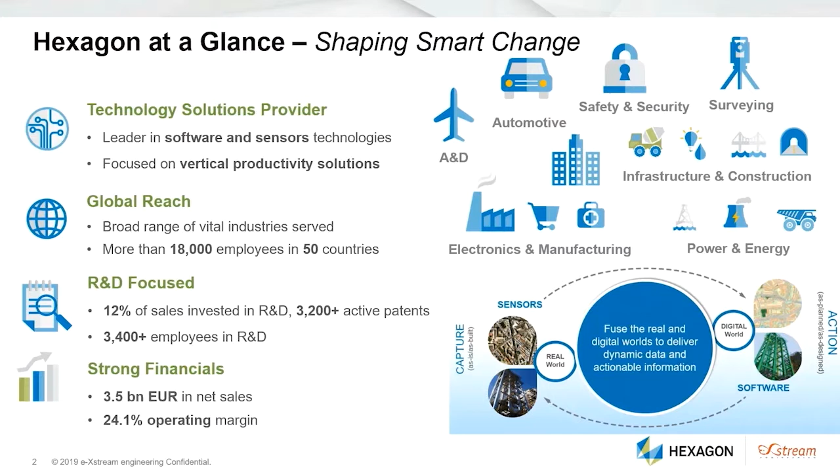Global reach and strong financials are the DNA of the technology solution provider company. HMI is our Hexagon Manufacturing Intelligence division, focusing on smart factories. The purpose here is to have a deep understanding of industrial workflow. The link between the real and the virtual, known as digital twin, aims at mastering processes with software for design and engineering, manufacturing and metrology, but also with metrology hardware. Hexagon HMI provides best-in-class solutions for smart factories.

As you know, after a period of production offshoring, companies are now willing to reshore. This can be achieved with smarter production organization and simulation. MSC Software is providing virtual prototypes for manufacturing with Simufact, and for structures, acoustics and fluids with Nastran, Marc, Actran and Cradle software. In the domain of autonomous driving, VTD, Virtual Test Drive, allows simulation of hours of driving in many conditions to accelerate validations.

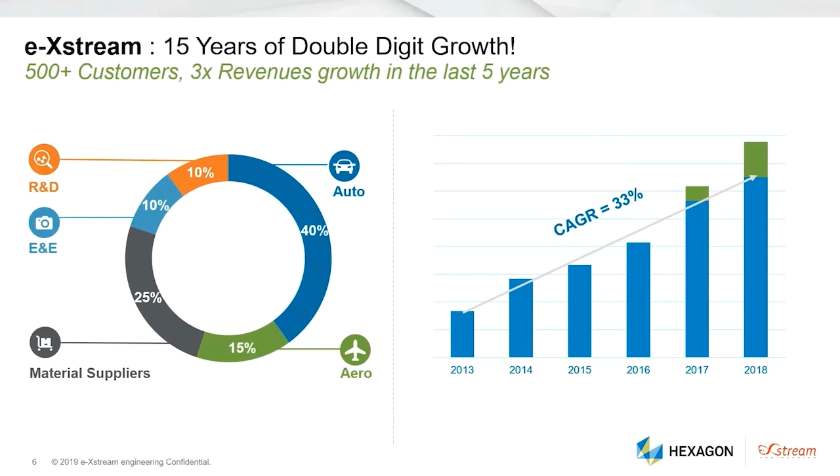In the field of materials, Digimat from e-Xstream engineering is pushing the limits of material modeling, addressing the challenges of new materials. e-Xstream engineering is a team of passionate material and process experts. Our software platform, Digimat, aims at providing the best of integrated computational material engineering. A newcomer in our portfolio, Material Center, is a preferred tool for material lifecycle management. e-Xstream has 15 years of double-digit growth and today more than 500 customers. The main domains of activity are automotive industry and material suppliers, but also aeronautics, electric and electronics, and R&D.

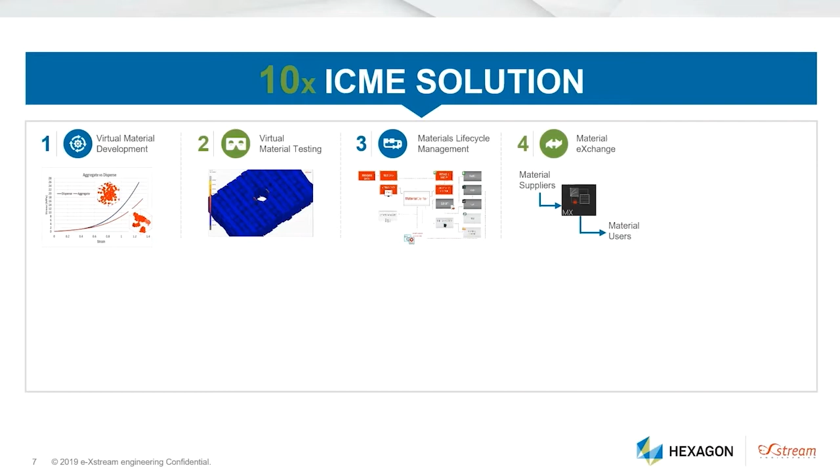We will continue growing thanks to this 10x strategy, and this is what we will talk about today. Virtual material development is the first topic we will cover, how to reduce costs with simulation. Then comes virtual material testing, where some huge savings can be found. Material lifecycle management is a growing subject, as well as material exchange. How to bring the R&D work to the desktop of final users is what we address here. Compliance management is probably not the favorite topic of material scientists. Nevertheless, if it's not well managed, consequences may be significant on day-to-day business.

Back to e-Xstream's DNA, the effect of processing is of course of main interest in integrated computational material engineering. At the core of our know-how is accurate material modeling to deliver the best results in CAE. With the fast-growing market of additive manufacturing, Digimat is again bridging the gap between processing and final properties. The rise of artificial intelligence is a challenge and a chance for ICME. Finally, going back to the real world and closing the loop of Hexagon strategy, digital continuity will end the presentation.

Welcome to this short video introducing virtual material development and its connection to molecular dynamics. Let's remind that since its birth 15 years ago, Digimat was designed from the beginning to be a fast, robust, and easy tool for the user. Second, e-Xstream customers benefit from premium support and expertise, which is more than welcome, especially in such challenging environments. Third, e-Xstream and Digimat's main mission is to bridge the scales and disciplines in an efficient and effective manner.

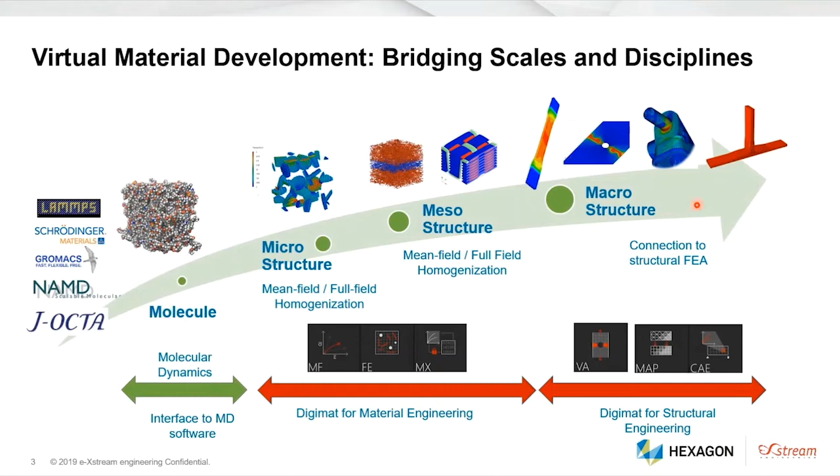Bridging scales and disciplines is key when dealing with virtual material development. Indeed, the goal is to connect the dots starting from the molecular scale until the structural scale. When dealing with virtual material development, there is a key notion which is virtual screening, standing for testing different configurations of microstructures and possibilities of combination of different materials. Digimat tools are built such that it makes it possible to test different configurations and types of materials, microstructures, and processes, which is key when developing virtually new materials.

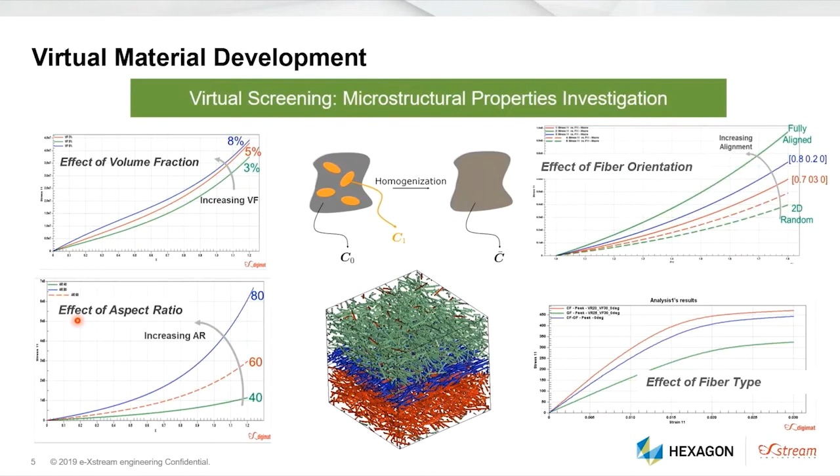Once the designer defines the process and the microstructure he wants to use for his next challenge, the next step is to refine the design of the new material by testing and virtual screening different local configurations and architectures, like testing the effect of different volume fractions or filler amounts, fiber orientation, aspect ratio, or fiber type.

Enough theory. Let's now move to concrete case studies in both the mesoscale and the molecular scale. First, let's begin with the mesoscale.

The first case study stands for investigating the ideal trade-off between stiffness and density for a foam microstructure. Foam microstructures can come with different types, whether it's an open cell topology or a closed cell topology. It can also correspond to different amounts of voids inside them. The idea of this case study is to find the best trade-off between the relative density and the relative stiffness for such microstructures.

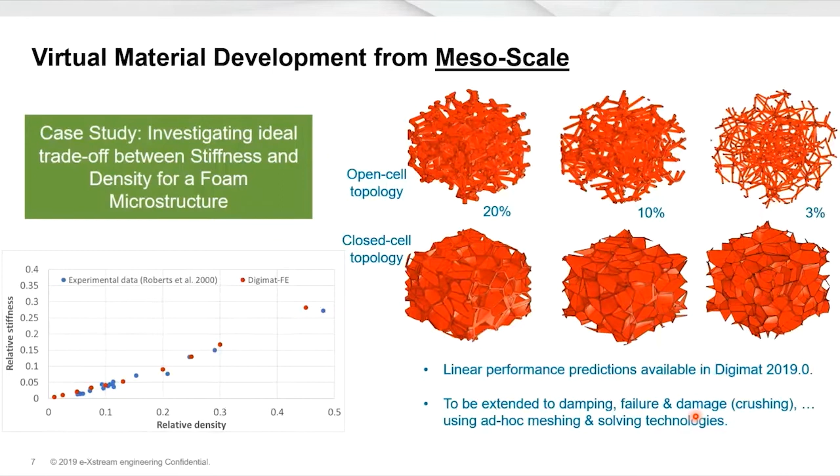As we can see, the Digimat tools can predict accurately the experimental data, plotted here in blue dots, by comparison to the red dots corresponding to the Digimat FE predictions. This is a first step and can be extended to more complex behaviors like the prediction of damping, failure, and damage using ad hoc meshing and solving technologies.

The second case study for virtual material development from the mesoscale is investigating the ideal reinforcement type and amount. The question here for the designer is whether to use carbon fibers or glass fibers, and with which amount of volume fraction. With this activity, we can compare 25 combinations, set them up, run them, and plot it in less than 2 hours.

When we compare such activity with physical material development, the latter can take up to months in order to perform such a study.

The third case study for virtual material development from the mesoscale is focusing on a highly emerging material process nowadays, which is 3D printing. The idea here is to use the multi-scale workflow for characterization of metal and polymer lattices for 3D printing. One of the major parameters is to optimize the architecture of the lattices that are printed into the structure.

The idea here is to virtually screen different configurations of architectures and end up evaluating the thermal, warpage, and stiffness impact that this architecture has on the final structure.

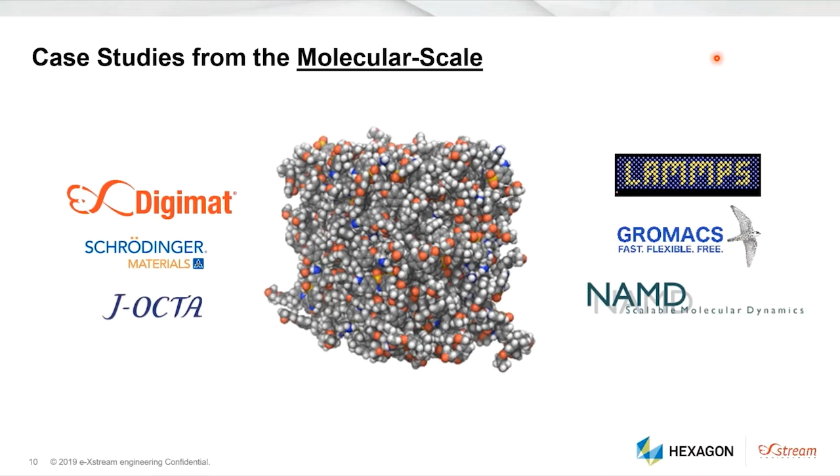Let's dive now deeper into the scales and go onto the molecular scale, and let's connect the dots between the atoms of the material and the final structure performance.

The first case study is focusing on the usage of molecular dynamics for feeding Digimat with a microstructural configuration. In this framework, the considered application is to optimize the positioning of silica particles inside rubber for tire applications.

In this framework, Schrödinger software for molecular dynamics is used in order to make the link between the molecular energy surface of the silica particles and their impact on the final configuration of spatial distribution of these silica particles.

The next step of the workflow is to use this result of molecular dynamics in order to feed Digimat tools in general, and Digimat FE in particular, with the positions of the particles, then build an RVE and deduce the stress-strain curves.

The next case study stands for using molecular dynamics and Digimat for material failure assessment. The idea here is to start from the atomistic chemical formula of a given resin.

Then, by using molecular dynamics software in order to assess the limit strain invariant failure parameters of the resin, we feed the Digimat mesoscale model with the resin failure properties, and Digimat is then able to compute the macroscopic composite failure. Hence, we make the direct link between the resin chemical formula and the final structural performance.

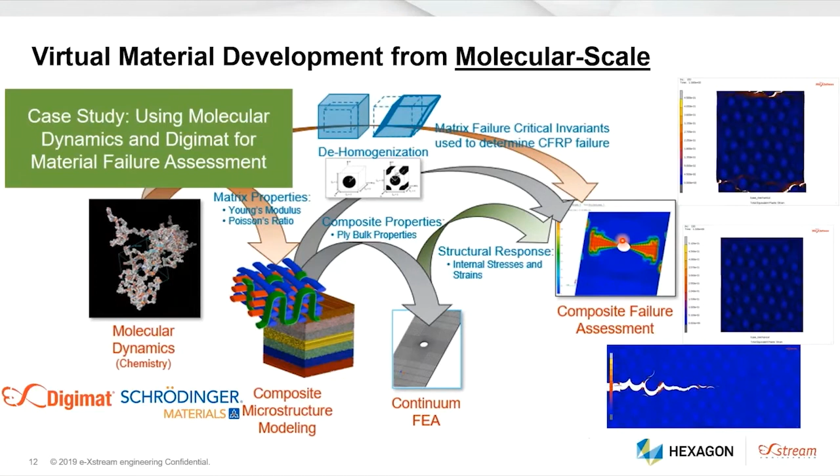We see an increased number of grades for a given performance. Indeed, different reinforced thermoplastics cover a similar range of applications, and other composite materials such as SMC and fiber mats bridge the gap from SFRP to CFRP. This has a direct impact on both material screening and characterization.

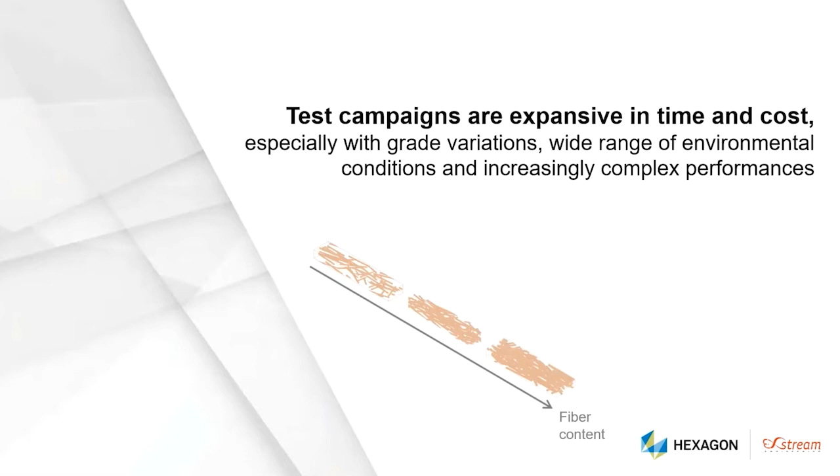Material characterization is expensive due to the number of options to evaluate. First, because multiple grade variations such as fiber content are considered. Second, because a wide range of environmental conditions including temperature, moisture, and aging should be covered. And finally, because design engineers now target advanced performances such as creep and fatigue, which tests last longer and therefore are more expensive.

Once a micromechanical model is calibrated on a reduced set of data, the strength of our approach is to predict composite mechanical response in other configurations. Such work allows combining a minimum of real tests with virtual tests to generate a wide range of data at composite level.

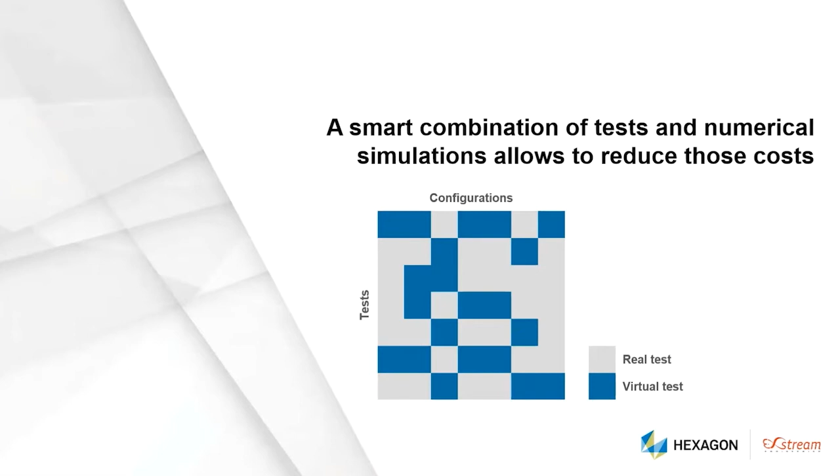Digimat enables several approaches of virtual testing. One approach consists in using Digimat as a virtual lab in order to compute composite mechanical response in other microstructural configurations. This allows, for example, to estimate material response at other fiber content.

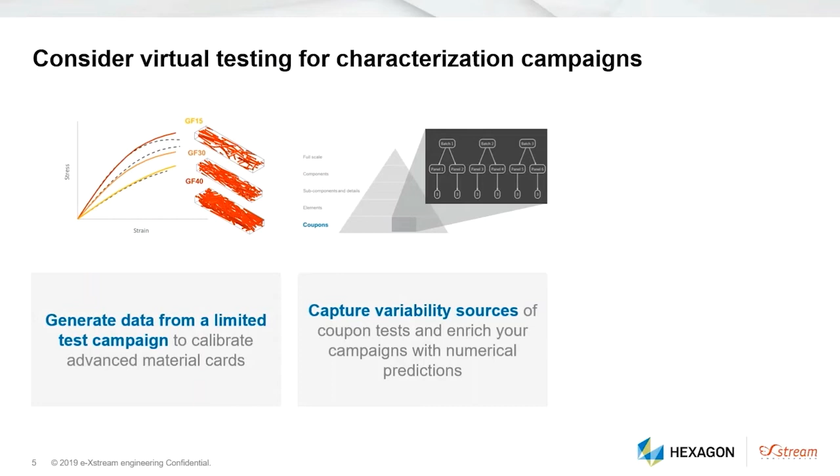Another approach benefits from its own product to capture variability sources at coupon level. The end goal is enabling evaluation of stacking sequence and to complement real tests with virtual ones, reducing the cost of very large test campaigns.

One last example is the estimation of the effect of defect at coupon level, which leads to knockdown factors to be applied to the design point. Here can be addressed effect of defect as well as of manufacturing. To consolidate those factors, Digimat allows evaluating the effect of some defects in different configurations for many tests.

Those are only examples, and we can think of many more approaches relying on Digimat bricks.

Digimat requires a certain number of inputs in order to calibrate material cards. Such a list of tests most likely becomes unaffordable when targeting calibration of many grades at multiple fiber content, in numerous environmental conditions, and for many performances.

A different approach can be envisioned by relying on numerical simulations to predict composite response and use a mix of real and virtual test data. Digimat-MF and Digimat-FE can be used to calibrate a phase model, which can then be used to predict composite response of any microstructure. This typically allows looking at other fiber content without investing in an extensive characterization campaign.

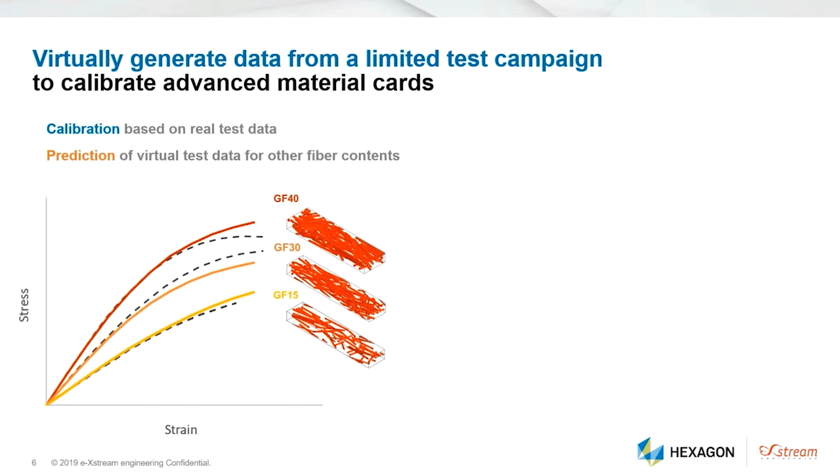Relying on those tools as well, a meta-model approach would allow calibrating a global model which could be adjusted to fit a reduced set of tests. Such a model can account for many dimensions, including environmental conditions, microstructure, aging, etc. The true strength of such an approach is that the more dimensions are considered, the fewer tests are required. In other words, the cost of additional material cards drops with additional dimensions.

In addition, based on this meta-model, interpolation of material cards for exotic conditions becomes possible instead of having to perform dedicated test campaigns. Those are the basement bricks of the virtual testing wall, allowing reliance on a combinatory matrix and virtual test data at best.

Inspired from the aerospace industry to compute allowables and design values, Digimat-VA relies on a building block approach to isolate variability sources. Different levels are introduced to cover, first, constituent variability from batch to batch, meaning matrix or fiber quality, for instance. Second, process variability from panel to panel, where the first layer is fiber content. And post-processing variability from coupon to coupon, targeting alignment accuracy with respect to loading direction.

Simulating the contribution of those variability sources at coupon level provides a cloud of response, allowing computation of virtual allowables and design values. Once each variability source is identified and quantified to capture average values as well as allowables such as A basis and B basis, the model benefits from greater trust.

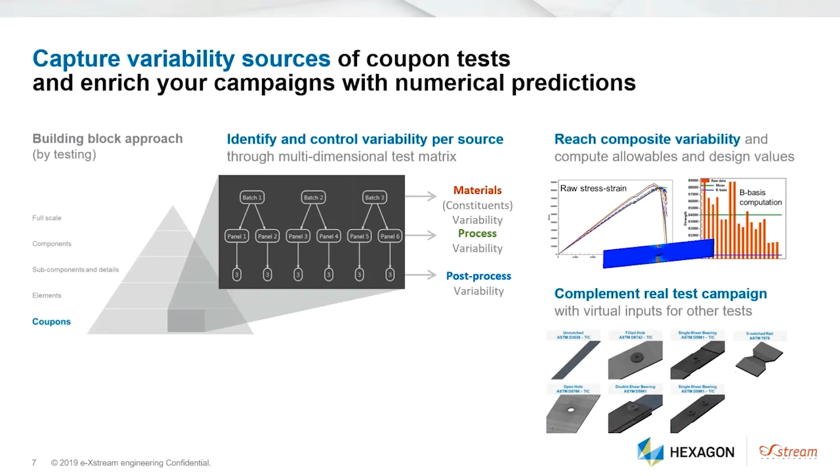Parts are unfortunately manufactured with defects, even though we try not to. Therefore, the design part must fulfill its intended function with the presence of defects. To design a part in such circumstances, margins are used to knock down pristine material allowables into design values.

The trade consists in tolerating a number of defects in a part, whose effect can be covered thanks to knockdown factors as a safety margin. It appears that such margins are challenging to evaluate and to separate from previously presented variability aspects: material, process, and post-process variabilities.

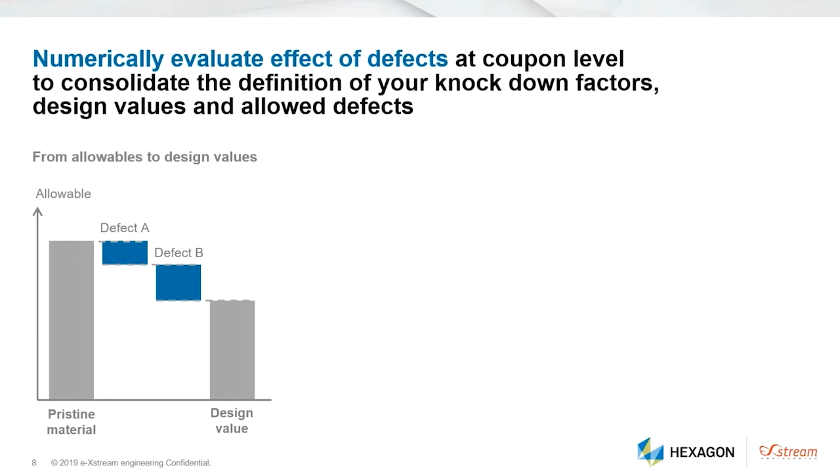Digimat VA allows you to simulate different defects at coupon level, including porosity, intra-ply and inter-ply ply waviness, as well as ply debonding. The resulting coupon simulation provides defect-associated knockdown factors.

Our target is to equip material engineers and design engineers so that they can virtually compute defect knockdown factors efficiently and accurately. With this tool, your team can consolidate knockdown factors for certain defects, trade between design margin and defined tolerances with greater confidence, and address non-conformity requirements with a more powerful tool than engineering judgment.

Switching back to the slide, your presentation is showing huge potential savings regarding material characterization. We know that the labs are heavily loaded because of demands coming from customers, and generally customer demands are very often different from one to another. The use of meta-modeling can greatly reduce the number of real tests required to answer such demands.

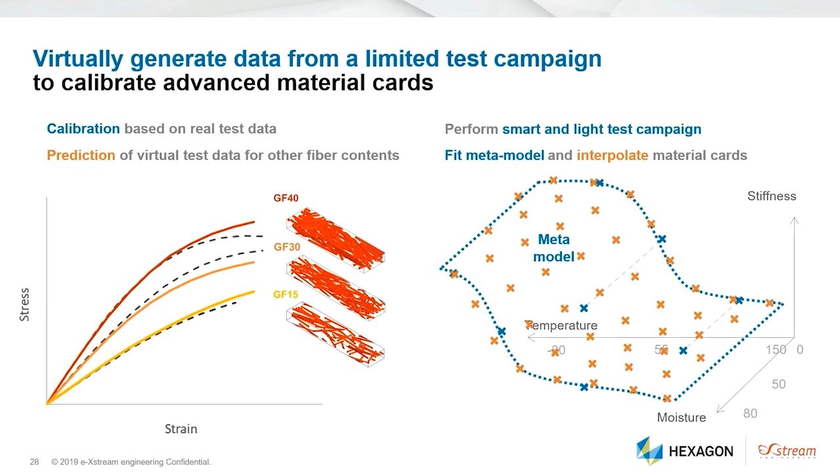Let's now switch to our third topic, which is material lifecycle management. Material Center is a software solution to manage material data information across the organization, and it is the backbone of the 3DS ICME solution. It will be presented by Najib Beg, who is the product manager of Material Center. This will last approximately six minutes.

So what are some of the challenges related to materials information management? If you look at a typical product development process, you have hundreds of parts with material specifications. You want to avoid multiple sources and inconsistent usage of materials data.

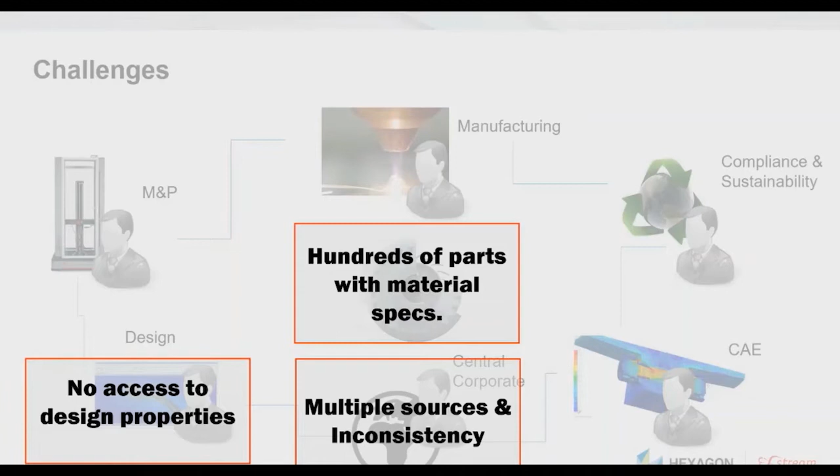Design engineers need access to their design properties. Materials and process groups lack traceability of their materials data. Manufacturing lacks understanding of material, process, and part performance. The compliance department wants to avoid restricted substances and conflict materials in design, while CAE wants to ensure efficient and correct CAE models.

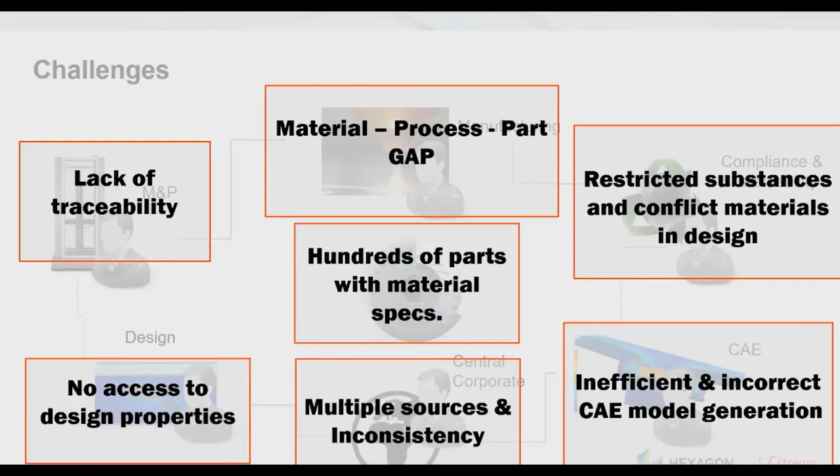What is the cost of all these challenges? You may face costly product failures due to incorrect usage of material properties. A typical engineer can spend up to 1.8 hours per day just looking for data. Data loss is a very common problem, and on average, organizations lose $4 million worth of data every year.

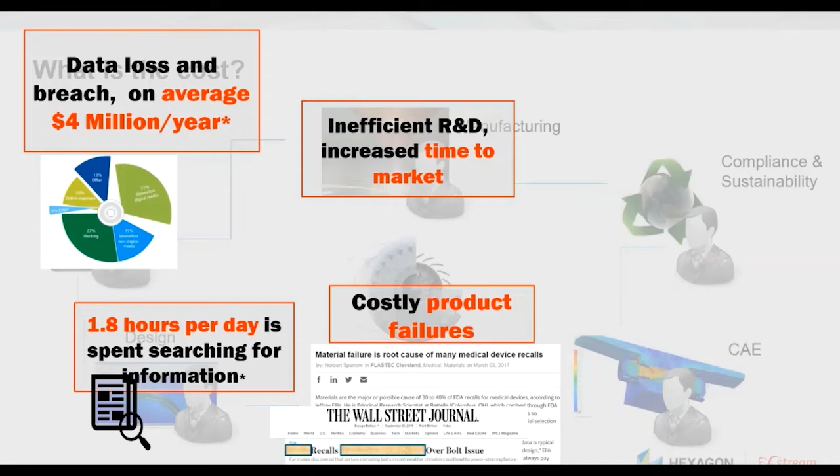Manufacturing can face increased research and development time, and hence increased time to market, due to a gap in understanding of the process. If you're not compliant with your products, you can face fines and imprisonment, while the consequence of using incorrect data in simulation may lead to incorrect design.

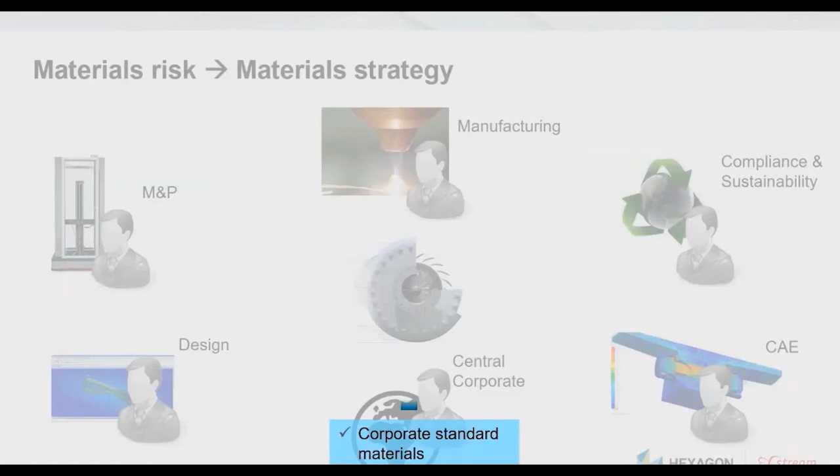What Material Center allows you to do is introduce material strategy into your organization. It allows you to capture all of your materials data in a single location, and using the web applications, your end users are able to access, search, compare, and export this data.

Design engineers can access the design specification not only through the web application, but also directly within their environment in CAD and PLM. M&P groups can manage all of their data, including test, virtual, and analysis data. Manufacturing can capture the entire process from material to process parameters to final manufactured parts.

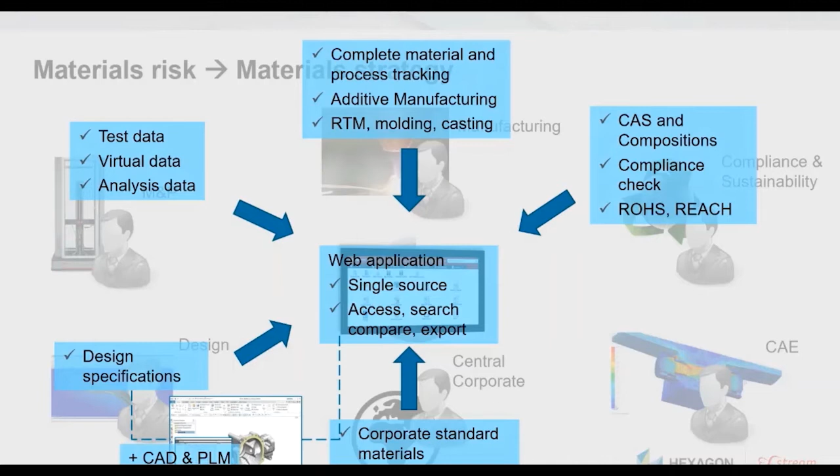Compliance can manage materials with CAS and composition numbers in a single location and then be able to run compliance checks instantly on the latest legislation. CAE can access and generate CAE models quickly from the web application or from within their CAE applications such as Abaqus and ANSYS.

MaterialCenter is an enterprise application that meets the stringent requirements for enterprise deployments in different industries, including aerospace. The application is prepared with access control and full version control capabilities.

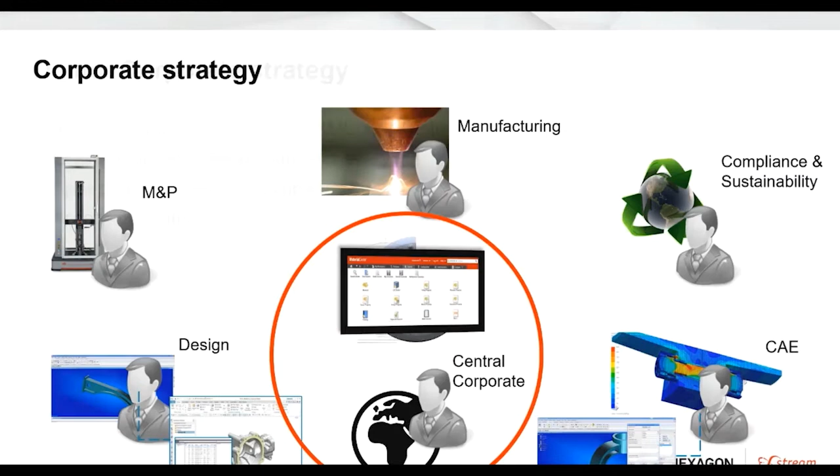Let's look at a software demonstration of how you can consolidate and centralize all of your materials data. You will see how you can import your data from Excel to create a single source for your entire organization, and use our application for accessing the data, searching, and comparing. Finally, we'll show our integration to access that same data through CAD and CAE.

So you can see we have a material specification in Excel. Within Excel, you can publish the data directly to MaterialCenter. You can automate this process as well if you have multiple sheets.

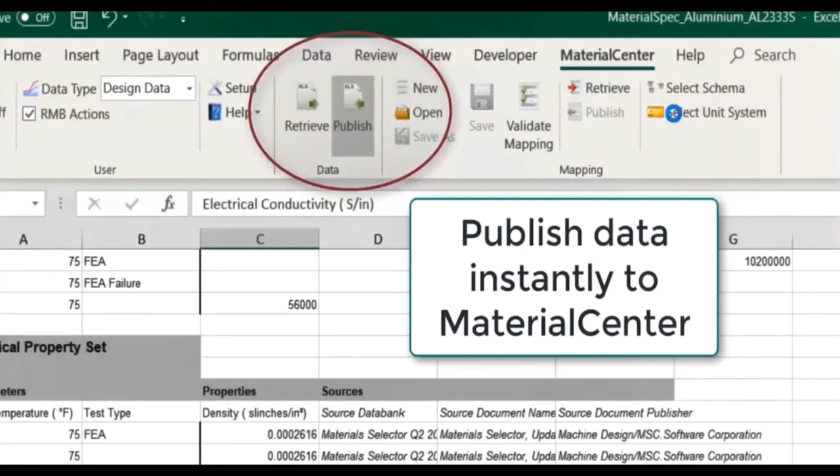You have all your global specs in a single location here, as you can see. On the left-hand side, you have all your materials organized according to your material characteristics. You have all the access control and version control needed, as well as the property overview. Here's a typical data sheet where you're capturing all the key information, such as composition, electrical properties, hardness, and mechanical properties.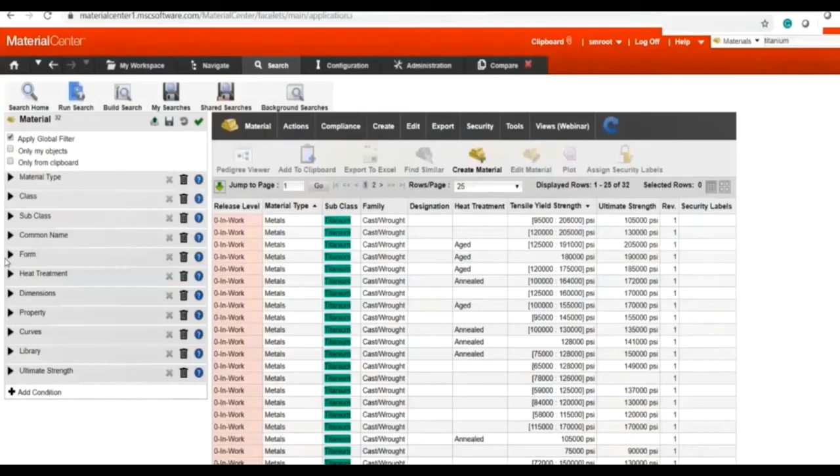You can do quick searches in a similar fashion as Google to find any material across all of your materials. You can filter those against properties. And here you can see a comparison of some implicit materials knowledge, where it can be used, previous experience, previous failures with this material, and any recommendation from the materials expert that needs to be communicated to design.

Now, the same information can be accessed through CAD, as I mentioned. There's no point in having a single source if you can't access it through your environment as a designer. We have an integrated app plugin that allows you to access the same data, where you can choose the material model or the properties needed for your design—material specification, material name, supplier name. All that information is then persisted into the model itself. As you can see here, you have the material itself along with the key properties.

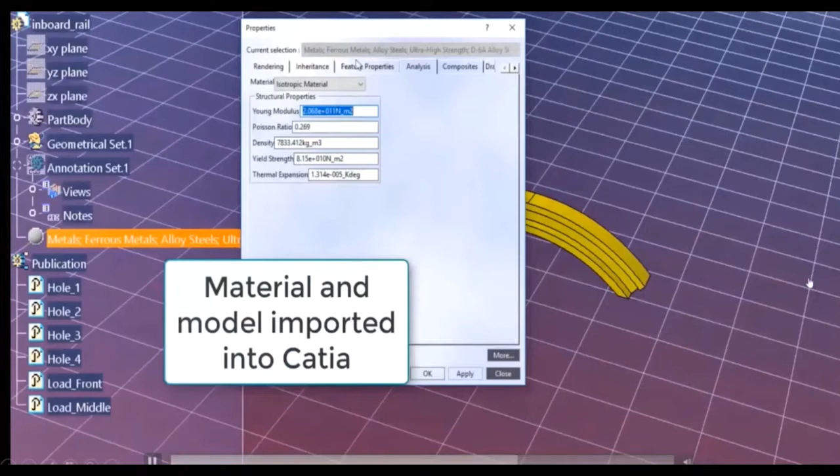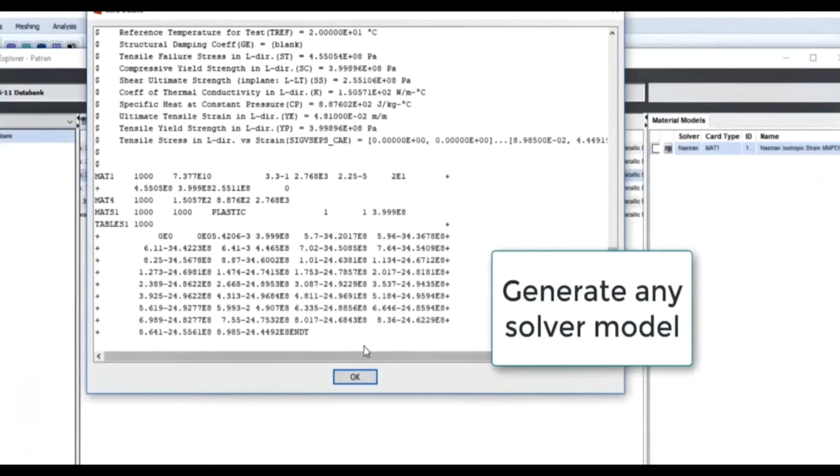In a similar way, you can support advanced simulation models. Here's the same data, the same database that we were accessing. The CAE engineer can search and find relevant data and import any type of material model. In this case, we're importing a Nastran model, but similarly you can create your own simulation models, whether that's for Abaqus, or any type of cards you need for ANSYS or any other solver. That model is generated automatically, so you save time creating those simulation models, and they are directly available within the CAE solver.

The key benefit here, of course, is that you have a single source, you have accurate information, and you have model generation done automatically—so you're reducing all three of the risk points I was talking about before.

Thank you very much, Najib. This is a dream made real—having organized information all over the organization and no longer losing time searching for data. I think everybody is looking for this.

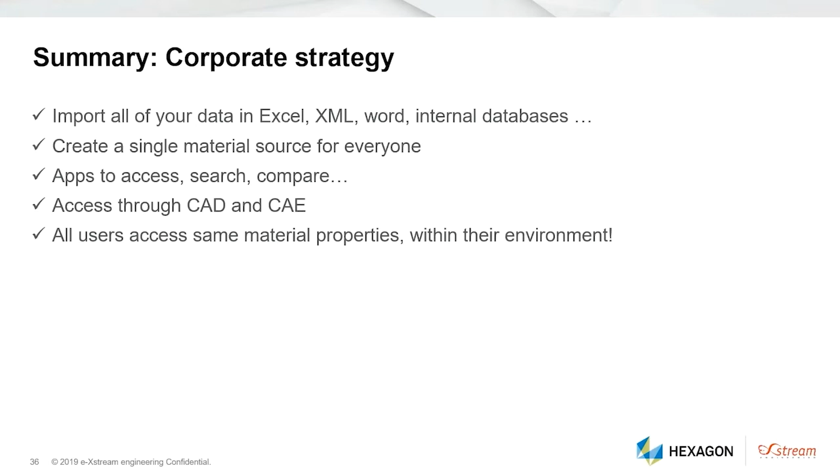After a long career in simulation, I personally find the CAE export very exciting, as I remember very often engineers wanted to generate material cards using their own tricks, sometimes leading to discrepancies for final users. With Material Center, anyone who is authorized can generate material cards, and every time it will be the same card that's generated. This brings confidence at the customer level.

Developing technology is not the purpose—sharing technology is what we target, as far as we can protect our IP. Let's now talk about Digimat MX and see how to leverage your ICME technology.

Since 2011, material exchange has been experiencing growth. This is due to a strong demand from end users to design and optimize their parts, and a strong demand for end users to better understand the materials they use and push the limits. Material suppliers' contribution is huge—there is significant investment on their side to promote their materials with Digimat models. As we will see, it seems the market is asking for more.

Listening to you, this is what we hear: many are claiming for more materials, more data, and more models. Lots of you want accuracy, reliability, confidence, and transparency. Some want a material usage dashboard, an on-demand database update, and reduced administration tasks. They also want to reduce characterization costs, protect their IP, and gain in visibility. Others are asking for methodology and alignment with standards. A few want to reuse existing measurements and make anisotropic models from isotropic ones.

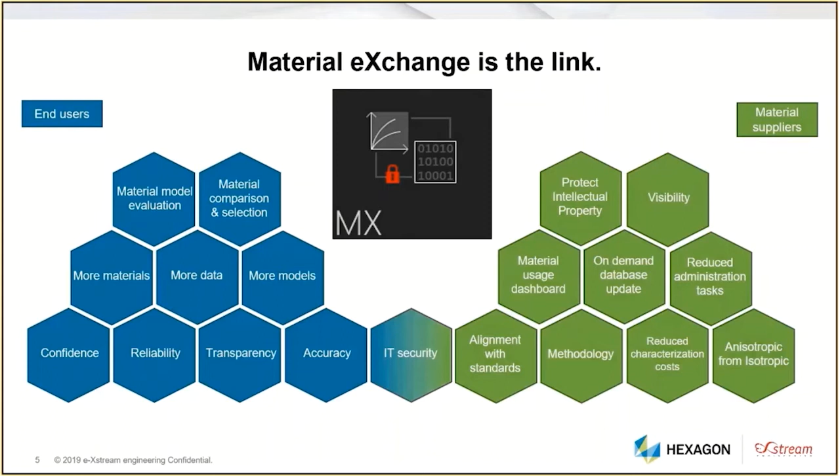Here is our vision: tomorrow we'll see an increase of new materials. In automotive and aeronautics, reduction of emissions, sustainability and electrification will continue. The automotive trend of autonomous driving will put even more constraints on design. Whatever the main field of application, the future is multiphysics. Tomorrow will require more material engineering and more material models than ever. We must be prepared.

With Digimat MX, all your investment in ICME is rewarded with increased customer intimacy. The customer request passes through Digimat MX, so it can be answered with an encrypted file to protect your intellectual property. Digimat MX is the pipe you use to push your ICME skill to the desk of your partners.

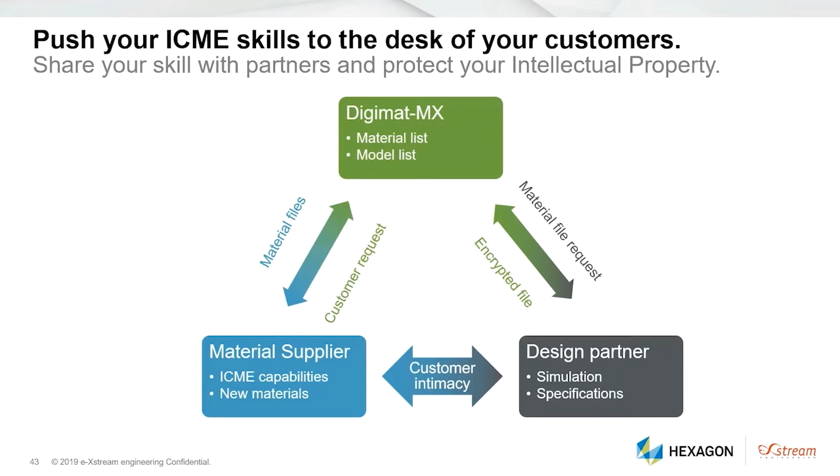Let's now talk about compliance and sustainability. Najib will present this part—Najib is our Material Center product manager. We will see what can happen in some companies having compliance management issues, and then how Material Center can solve this.

If you look at the final aspect here in terms of compliance and sustainability, there's a lot of challenges related to material compliance. There's no control on what materials are being used in products. Materials information is disorganized and spread across different departments, on local computers, file cabinets. So the compliance departments are really having a difficult time to control the process and ensure that no one's using restricted substances. There's typically no access to the latest legislative information, and new legislations and substances are generated every day. It's a very challenging and complex landscape.

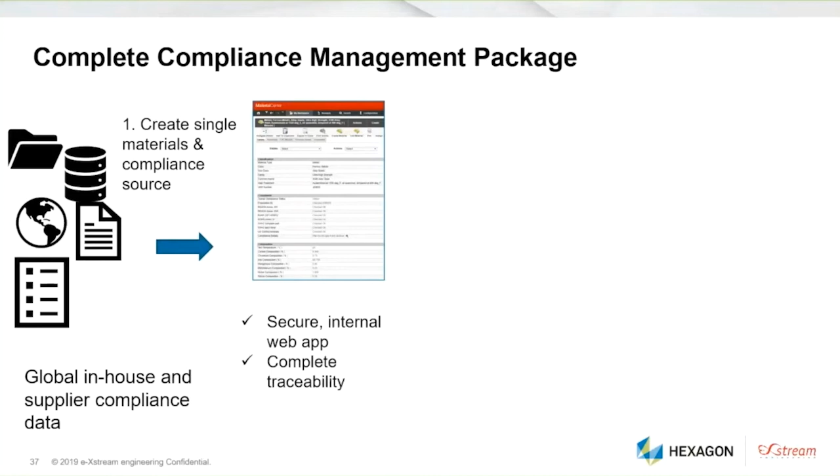So what you can do with Material Center is create a single source of your materials and compliance data that is securely managed with complete traceability and access version control. Through our partnership with iPoint, who are market leaders in the compliance sphere, you can run instant checks on compliance and always get the latest information on REACH, RoHS, SVHC, just to give you a few examples. But they have a full comprehensive suite of legislations, and they also have specific product solutions for running part compliance checks.

Using our integration and collaboration, you can run scheduled runs on all your materials every 10 minutes, every 24 hours, to set up the system. And then you're able to get the latest compliance information for your whole organization. So let's look at a demo on that.

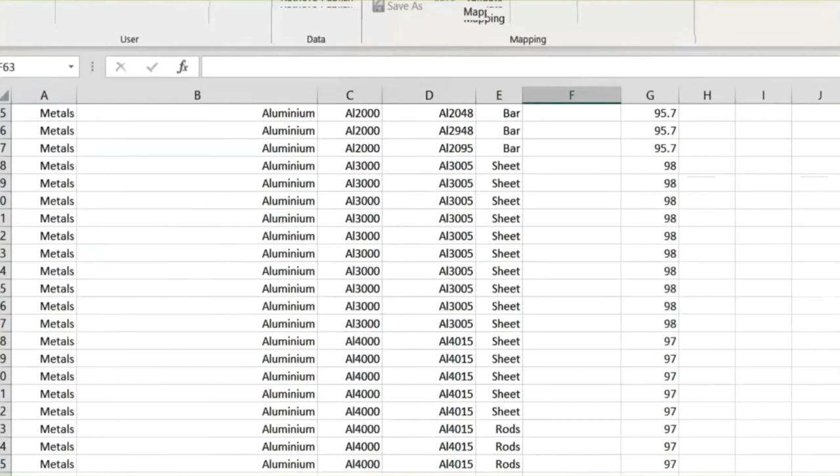So here we're importing some compliance data. As you can see, it's different materials, and we're publishing the data into Material Center. In a similar fashion, you have the same single source with key composition data and CAS information within the system, and everyone is using this. And then you can run a compliance check.

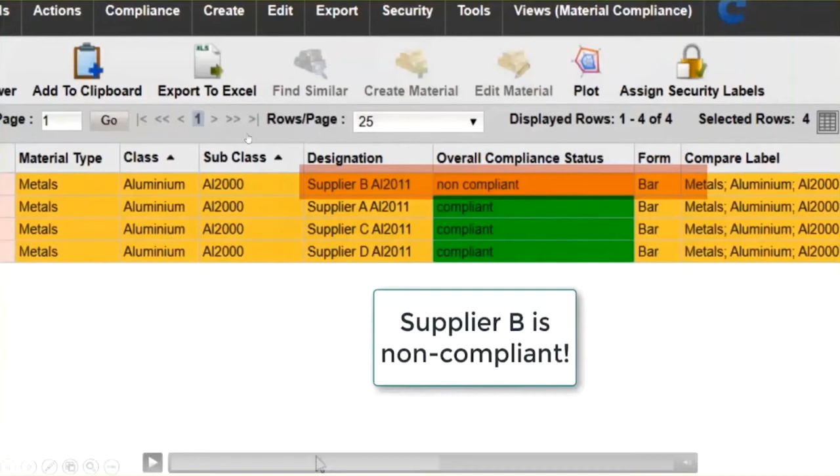Either interactively, this information is sent to iPoint, which gives you instant information on whether your materials are compliant or not. Here we can see we are evaluating 4 different suppliers, and 1 supplier is non-compliant. You can also get an overview of all of your materials to get a summary report, and here we can see there's 1 material that is non-compliant, and it's the same supplier B that we were looking at before.

Now, for other use cases, it's critical that we have the same access for the designers as well, so they are aware of the compliance information and are not assigning or using material data that is non-compliant. So here you can see the design engineer: first the compliance department did their checks and managed all the data, and now they're communicating that information to the design department so they can understand which materials they can use and which they can't, or which they should avoid.

Thank you, Najib. It is very interesting to see how Material Center can push compliance information right to the hands of designers, avoiding further troubles.

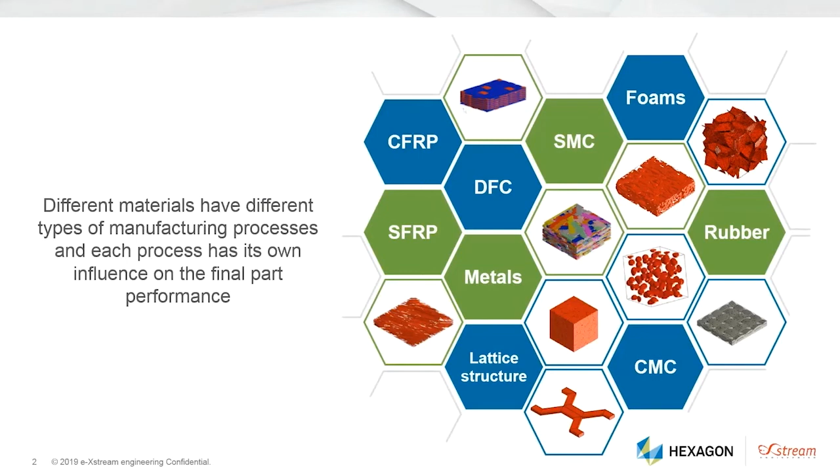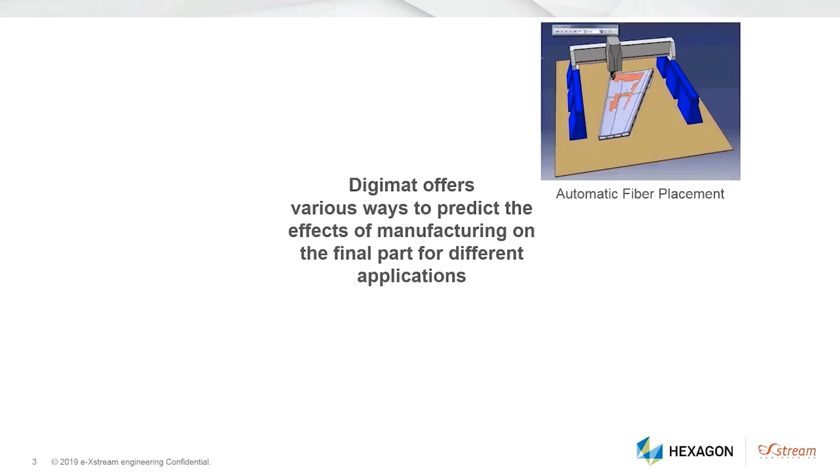All over the industry, different materials and with them different types of manufacturing processes are used, which will have a direct influence on the final part performance. To precisely predict your part behavior, it is therefore necessary to know the effects of manufacturing by taking into account process data and simulations. Therefore, Digimat offers various ways to predict the effects of manufacturing on the final part for different applications. Some examples are automatic tape or fiber placement, thermoforming and draping of continuous fibers, 3D printing of filament or powder-based plastics, injection molding of short or long fiber reinforced plastics, and the curing of thermoset matrix composites.

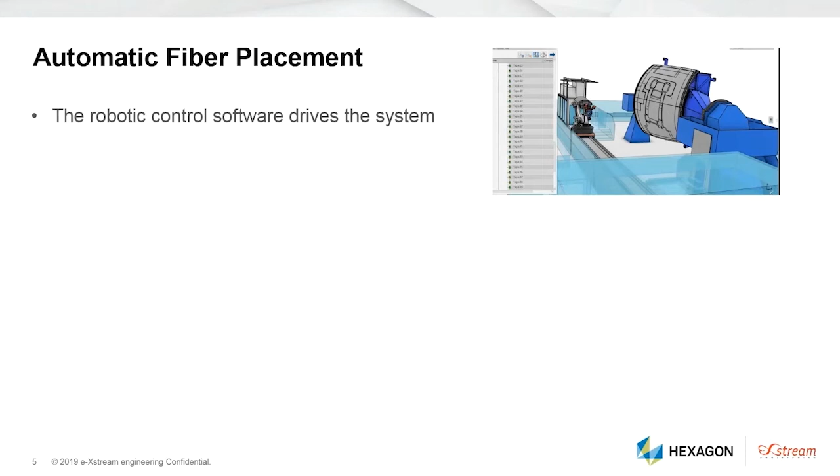Let us begin with automatic fiber or automatic tape placement, which is a very efficient method to produce large parts made out of continuous fiber composites, for example in the aerospace industry. In this method, a robot head places tapes of fiber tows automatically in a predefined way on a surface. The robotic control software drives the system and is very important, as it forms the design and manufacturing interface, bridging the gap between the as-designed and the as-manufactured part.

The second topic is thermoforming and draping, another method to produce continuous fiber composites, especially for higher part quantities. During the forming of the part, the material is locally moved and pulled in different directions. This influences the fiber direction, but it can also cause wrinkling in the corners.

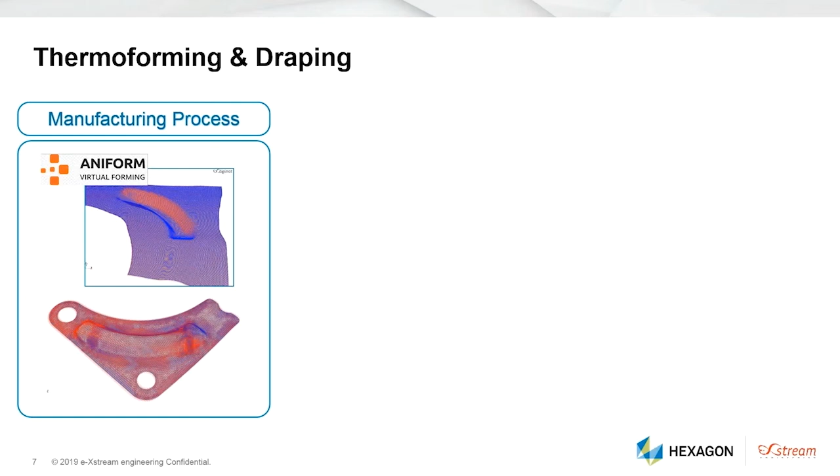Coupling Digimat with a thermoforming or draping tool allows you to predict various effects on the material and part quality. It allows you to determine the thermomechanical response of the material and the local influence of the manufacturing process on the microstructure. This information is then used to simulate residual stresses, warpage, and part performance.

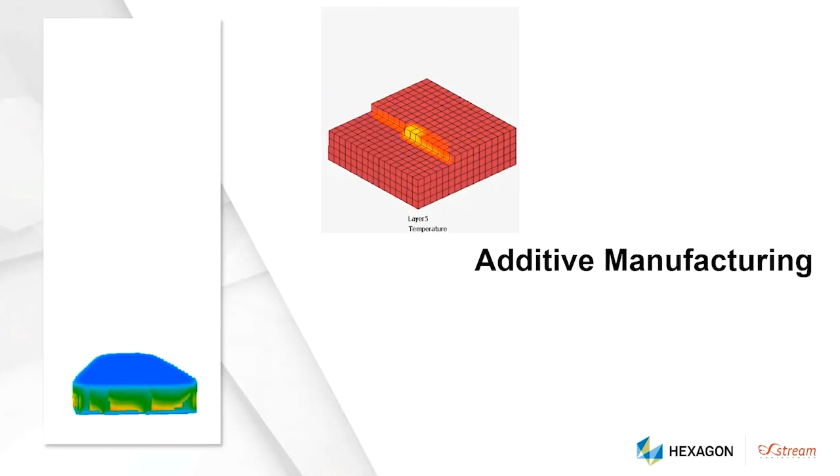With additive manufacturing, or 3D printing, the design engineer has a lot of freedom for innovative designs and optimal load distributions. However, this manufacturing method also comes with its limitations and difficulties. Additive manufacturing will allow you to design a great part, but its performance directly depends on the printing process, as it is driven by the toolpath and print direction.

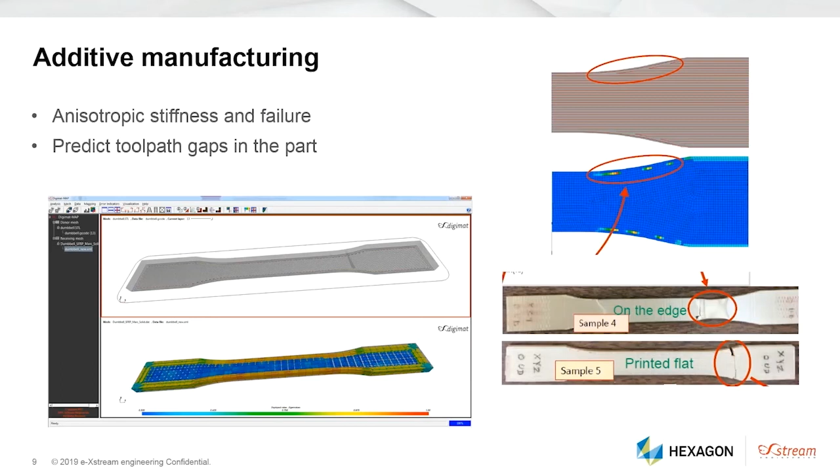Digimat helps to evaluate the influence of the printing toolpath in multiple steps. First, the Digimat material card helps describe the complex anisotropic material behavior that depends on the local filament direction. Additionally, Digimat helps detect toolpath gaps in your part. Those gaps are voids that appear between filaments and create weak spots in the printed part, which can cause early failure. Being aware of this allows the engineer to optimize the printing strategy for better part performance.

Originally, Digimat was made to bridge the gap between manufacturing and structural performance by taking into account the local fiber orientation of fiber-reinforced parts. This is what allows us to do precise simulations of short and long fiber-reinforced plastic parts. To obtain the overall fiber orientation of the part, one can either scan already manufactured parts with CT scan technology or run injection simulations to test and optimize the manufacturing method virtually.

Nowadays, Digimat RP contains the integrated fiber estimator to quickly obtain a realistic estimation of the fiber orientation, which leads to a more precise simulation. In its latest release, Digimat can use solid as well as shell meshes to run the injection simulation, and it can also predict weld lines and their effect on the structural performance.

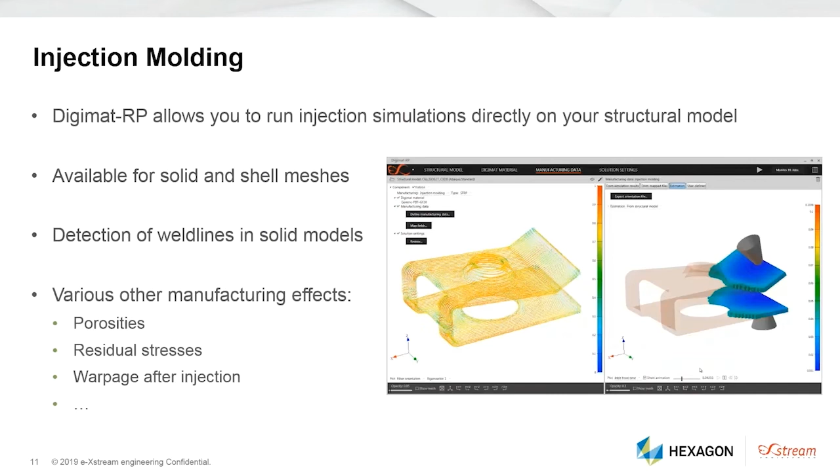Next to the direct simulation in RP, it is also possible to take into account a large variety of manufacturing effects, such as porosities, residual stresses, warpage, variable fiber content, and many more.

Last but not least, I will introduce you to the curing of composites, which is a critical point for the manufacturing of thermoset composites.

Curing usually describes the hardening of a resin using elevated temperatures to obtain the final material properties. The problem with this process is that often parts deform and end up with residual stresses that can make the part unusable.

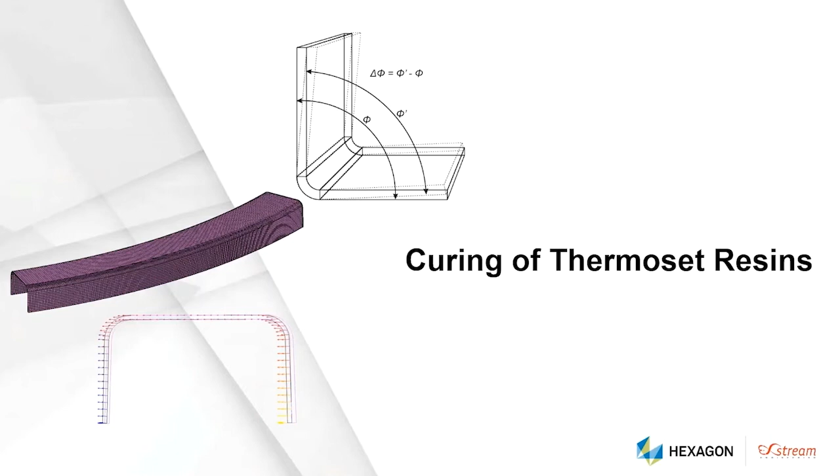Especially internal stresses in corners or roots can influence the structural performance and create delamination of layers within the material. Digimat helps predict such critical areas in order to avoid creating weak spots in the manufactured part.

Thank you, Florian. It is very impressive to see how Digimat has brought diversity to its portfolio. We are far from software dedicated only to injection molding short-glass fiber materials.

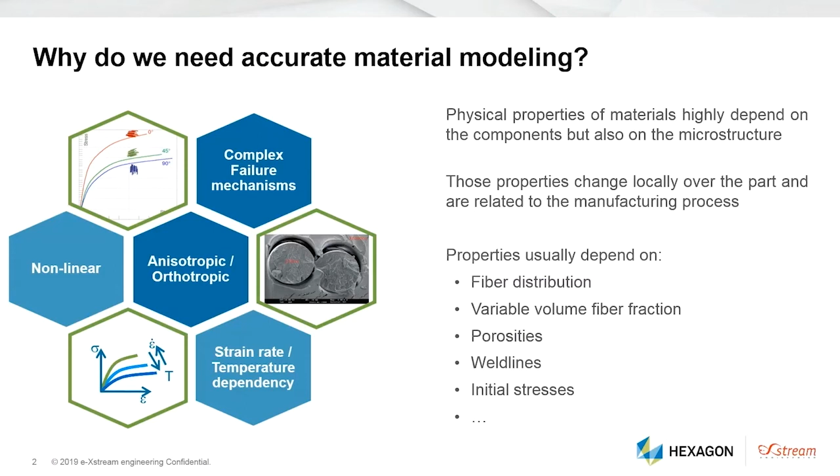Furthermore, all those properties can change locally all over the part and depend on things like fiber distribution, volume fraction of the fibers, porosities, weld lines, initial stresses, and many more. To be able to consider all those details and create a true digital twin of a material, the industry needs accurate material modeling.

The e-Xstream ICME solution brings you the tools to cover all parts of accurate material modeling. Our material models bring you the nonlinear behaviors for static, crash, fatigue, and creep, which are able to give you a fully anisotropic stiffness, damping, and failure.

Our failure mechanisms allow you to model realistic failure envelopes with progressive damaging, including static, dynamic, and cyclic fatigue failure models. Finally, all those parameters can be made strain rate and temperature dependent to fit exactly your loading scenario, covering everything from static creep to crash and vibrations.

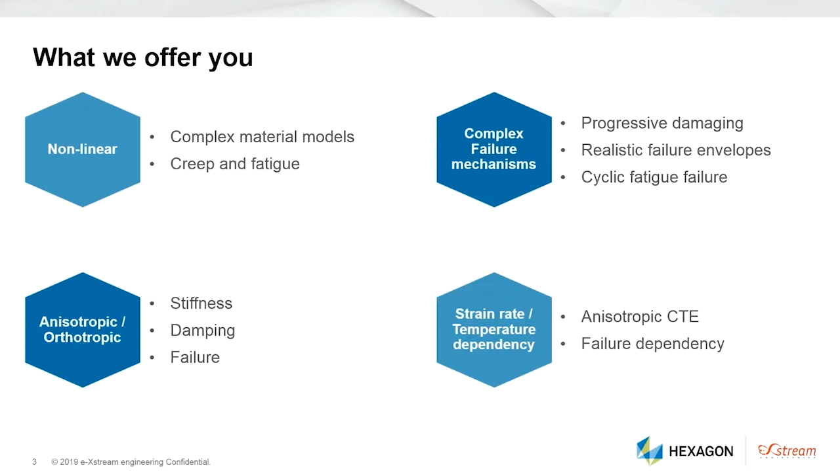In order to define such complex material models, we created a reverse engineering process that allows you to turn your experimental data into material models, taking into account the constituents and microstructure.

With the newest version of Digimat, you will be able to reverse engineer thermal expansion, static and dynamic stiffness and failure, temperature dependencies, strain rate dependencies, cyclic fatigue failure, frequency dependencies, and creep and stress relaxation.

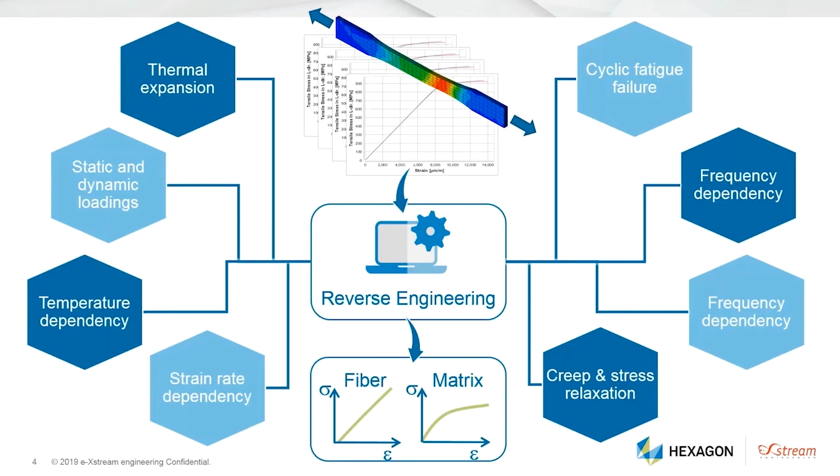Once you created your advanced material model, we offer you Digimat RP, an incredibly easy to use interface to apply the material in your analysis, even for large assemblies. In just a few clicks, Digimat RP can generate a working material model directly from your experimental data curves. Then load the microstructure information on your part and you're ready to submit your analysis using our accurate material models. All this is done through one single interface. Since our latest releases, Digimat RP can also post-process fatigue analysis and give you life cycle predictions on your parts.

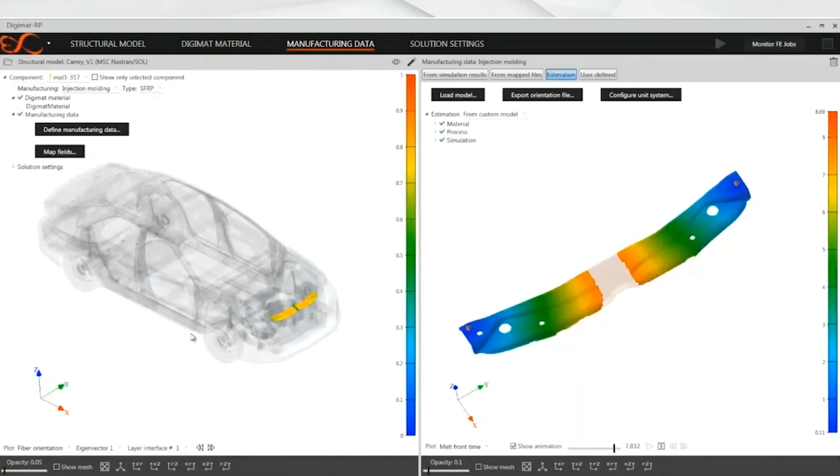If all this is not enough, we also offer you full field homogenization, capable of modeling every complex material. You can create any possible microstructure and analyze it to determine the physical properties of the material. We are permanently improving our models and algorithms, so our recent developments allow you to create more realistic RVEs, improve the mesh, apply new failure models, and solve your simulations up to 100 times faster to get the true experience of accurate material modeling.

Thanks again, Florian, for this presentation. I didn't realize how many behaviors we can now reverse engineer in Digimat MX. This is huge. We can address many behavior types, and we're not finished.

Now it's time to talk about additive manufacturing. This fast-growing technology will be presented by Dr. Olivier Moulinjeune, Business Development Manager in charge of additive. The presentation will last approximately 6 minutes.

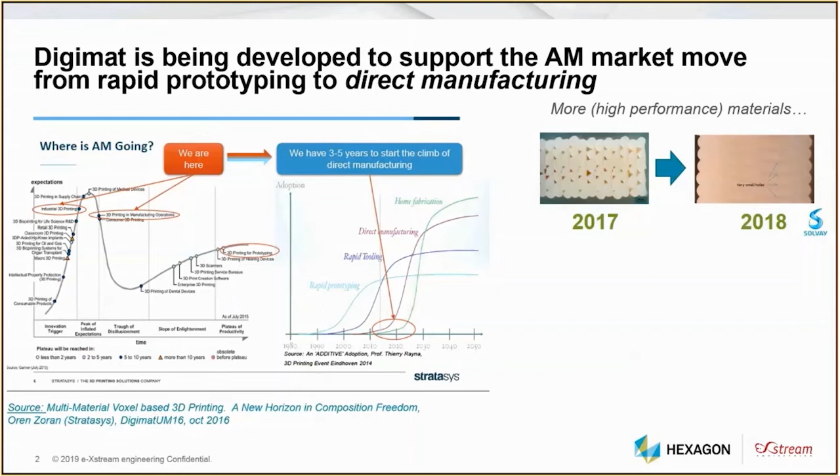Our ambition at e-Xstream is to support this market move with numerical simulation. We want to increase the number of high-performance materials, to ensure more accurate and reliable parts, and be able to predict the part performance.

In summary, in terms of the needs, we want to propose the same validated engineering workflow as more traditional manufacturing techniques such as injection molding. In terms of the challenges, the process reliability and its complexity, a lot of parts still suffer from warpage, from shrinkage, from part delamination from the printing bed.

3D printing parts will often show anisotropic behavior, even for non-reinforced materials, because of the toolpath or the build orientation. There is a lack of knowledge and a lot of trial and error techniques.

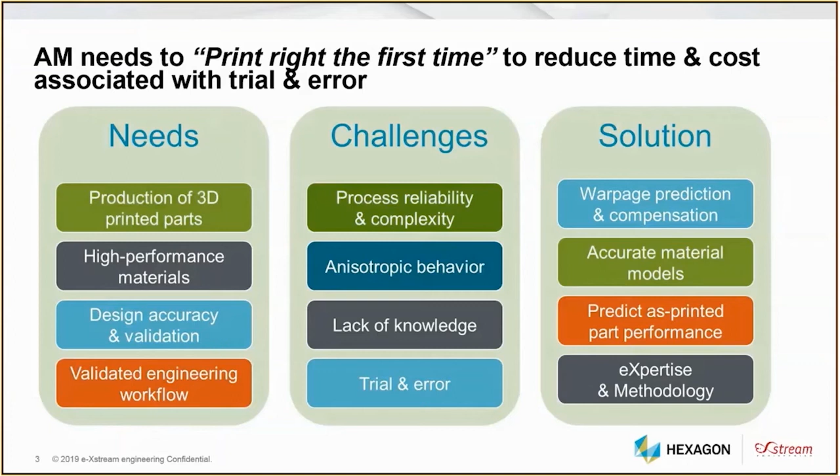The solution that we want to propose to the market is to predict warpage and compensate for warpage, to derive accurate material models ready to use, and to predict the as-printed part performance. And of course, you can always rely on our expertise, and we are able to develop any methodology for your own use.

The solution that we propose with Hexagon MSC software on additive manufacturing is made on topology optimization with Amendate and MSC Apex. The different Digimat tools and solutions that constitute our additive manufacturing solution create three main building blocks: material engineering, process simulation, and part performance for FDM and SLS processes. And finally, you can inspect the part with Hexagon scanners.

We haven't built this solution alone. We have created a full ecosystem of material suppliers, printer OEMs, R&D centers, and end users. Today we will illustrate two of these partnerships, the first one with Stratasys.

If we consider the usual printing workflow, we start with the design, some pre-processing to slice the part, to define the tool path, we print physically the part, and then we do some post-processing. Our ambition with Stratasys is to integrate numerical simulation at the heart of this workflow, to first define what is the best material for the usage, to optimize the process and minimize warpage, and finally to master the performance of the part.

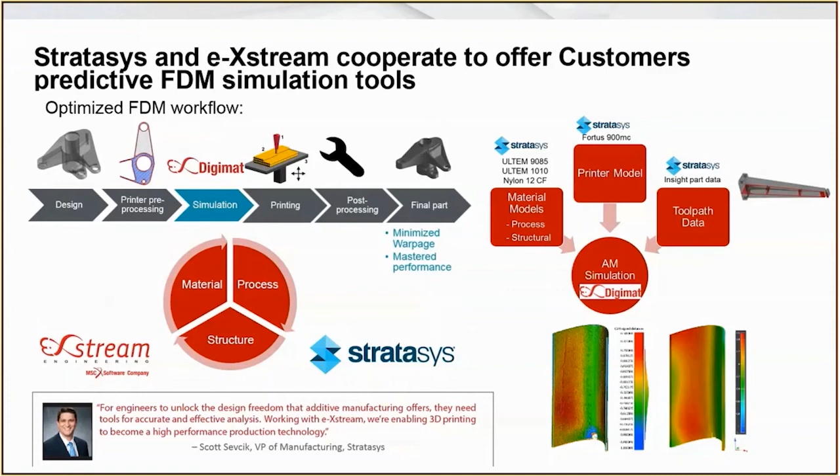Digimat AM aims at printing right the first time, predicting warpage and residual stresses. In Digimat AM, you will select the manufacturing process and the printer. You can define the part, which is a STL file format. You need to select the material from our database, in this case the ULTEM 9085, and then you can input the toolpath and define a couple of process parameters. Finally, we need to mesh the part before we can submit the job.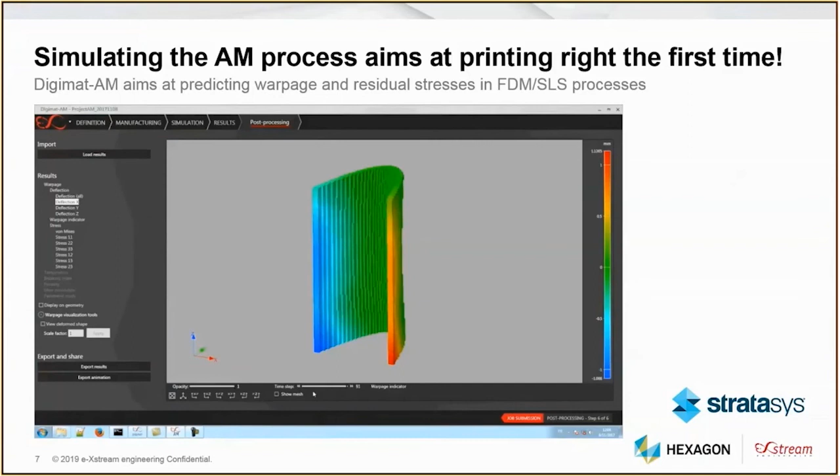Then you can analyze the warpage analysis, so what are the deflections that we see, create an animation of the full build, review the residual stresses, and export some simulation results. And finally, we can compare with scanning data.

The second partnership that we want to highlight today is with Solvay. Solvay is developing materials for FFF with PEEK reinforced with carbon fibers, and PPSU, and in SLS with PEG powders. These are a couple of examples where we have been able to help Solvay by modeling the as-printed material microstructures, working on fibrous reinforced materials, and defining a multi-scale workflow for lattices.

And in terms of part performance, we want to optimize the printing strategy to simulate reinforced filaments and test partial infill for lightweight parts.

The objective is to predict the fiber reinforced FFF part performance with the same ease of use as for injection molding, and for this we use Digimat-RP, which is now open to fiber reinforced FFF as the KetaSpire PEEK carbon fiber filament from Solvay.

So by taking the toolpath into account, the engineers are now able to predict what will be the maximum force that the part can sustain and compare that between different building orientations or comparing that with injection molding grade.

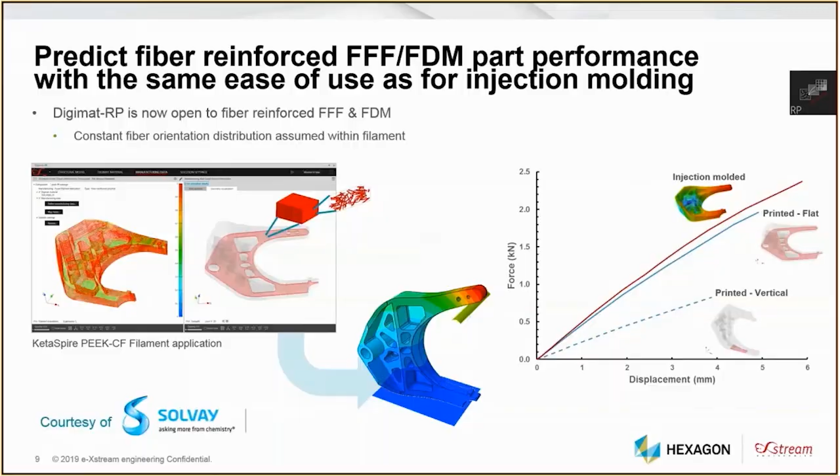Thank you, Olivier. Before we close this topic, we can mention the partnership we have with DSM in the field, with 4 materials available in DigiMat already, and maybe more to come.

Our topic number 9 is about artificial intelligence and how we can apply it to materials. This presentation will be given by Philippe Ebert, Product Manager at e-Xstream engineering. The presentation will last about 4 minutes.

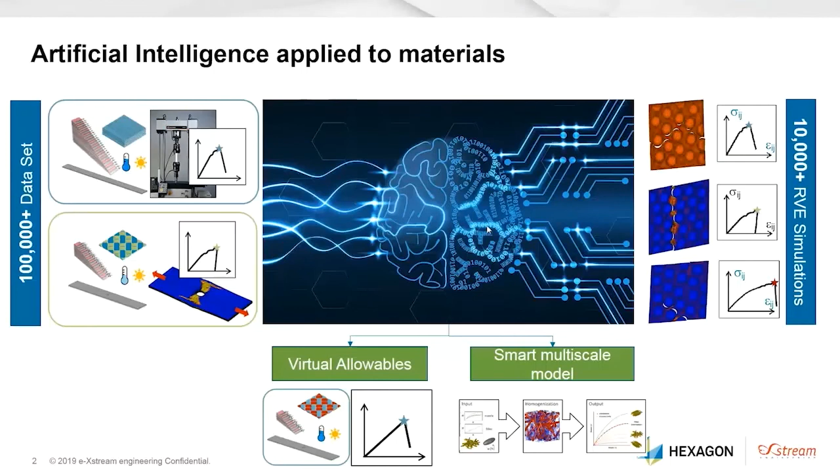Material intelligence means artificial intelligence applied to materials. Today we'll have a look at two use cases, one for virtual allowables, the other one for smart multi-scale modeling. Let's start with AI for virtual allowables.

AI for virtual allowables means training an AI model with hundreds of thousands of experimental data and simulation data points, which can be worth millions of euros and decades of labor. The idea is to be able to predict in a fast and accurate fashion virtual allowables for other combinations of material systems, stacking sequences, coupon geometries, and environmental conditions than the data that were used for the training.

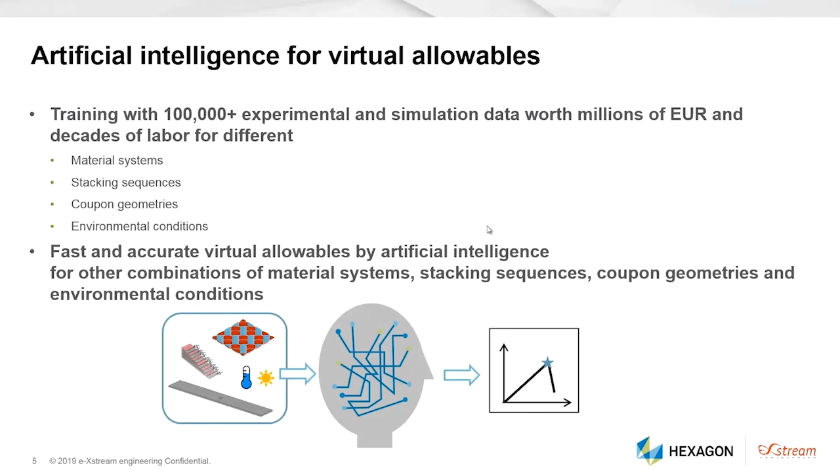Let's have a look at a very concrete example. In the next example, the training data that was used consisted on one side of 15,000 simulation points and 56 experimental data points. The first step consisted in training the model with Digimat-VA predictions.

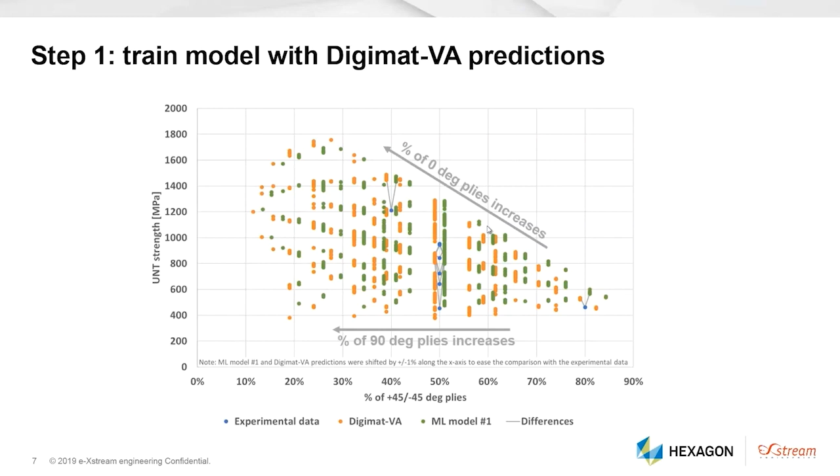As you can see here on the graph, the machine learning, represented in green dots, is able to capture quite well the predictions of DigiMat VA, here in orange. However, at this stage, the experimental data points have not been used yet to train the machine learning model.

First conclusion from this exercise is that the AI can bring the VA predictions closer to experimental data. One should note that AI cannot compensate for the fact that physics that would not be included in the simulation cannot be captured. As next steps, we would like to extend to other material systems than UD materials.

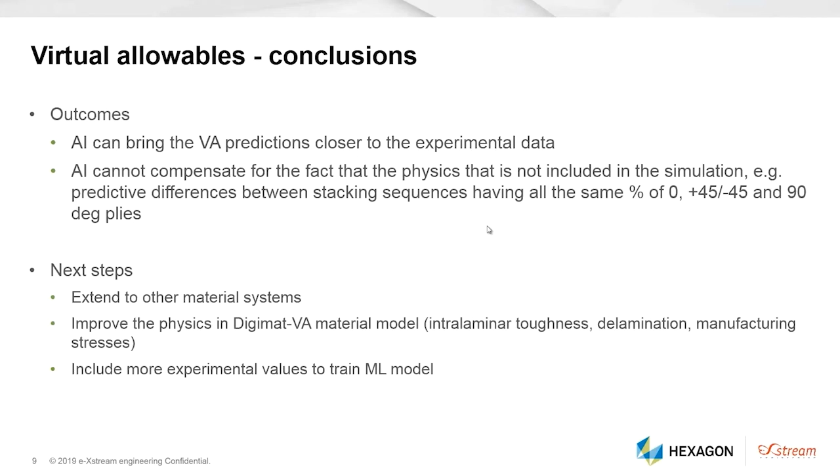We would like to improve the physics in the DigiMat VA material model to be able to capture them with the AI model, as well as include more experimental data values to train the machine learning model.

Let's now have a look at AI for smart material model. The idea with AI, a smart material model, is to train a model with tens of thousands of simulation data coming from microscale simulation under different loading conditions. What we can then achieve is a fast and accurate prediction of the material behavior at the macroscopic scale by artificial intelligence.

In the next example, the training data consisted of 7,500 macro stress-strain histories with 100 points each, predicted by Digimat FE with a single FE model, which was actually worth 80 days of CPU time.

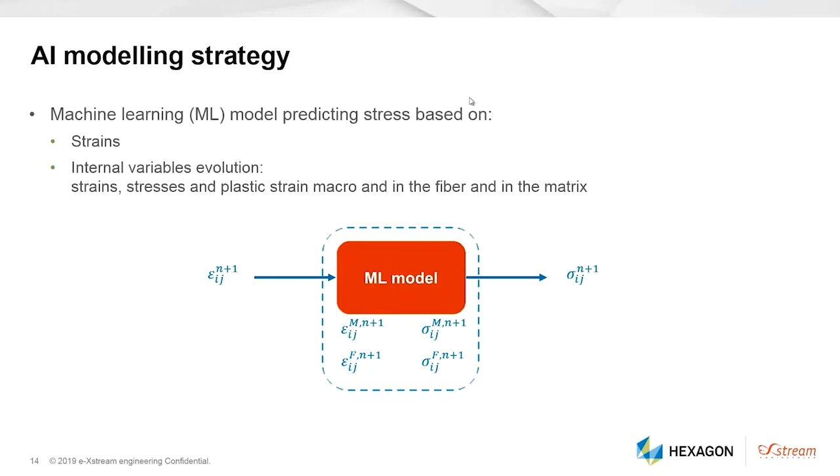The modeling strategy consisted of predicting the stress based on the applied strain, as well as a series of internal variable evolutions, namely strains, stresses, and plastic strain, both macroscopic and inside the fiber and matrix.

The conclusion from this exercise is that the first machine learning model was developed to simulate the elastoplastic behavior of a UD material. Machine learning offers great potential to develop and deploy high-fidelity material multi-scale models with barely any computational requirement for end users, as these have all been applied upfront.

As a next step, we intend to improve the accuracy of machine learning models using more simulation data, as well as extend the models to variable phase properties and microstructures, and enhance them for damage and failure predictions.

Thank you, Philippe. It is always surprising to see how artificial intelligence can provide fast computation with somehow good accuracy. Nevertheless, as you mentioned, the physics we want to capture must be in the simulation used to train the artificial intelligence. This means we can still continue to improve Digimat with more and more complex physics inside.

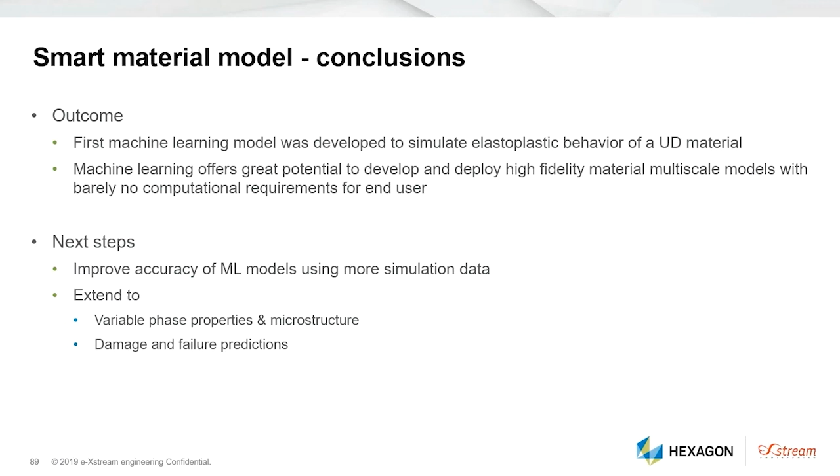Philippe will now hand his presentation with the last topic of our 10X ICME, digital continuity.

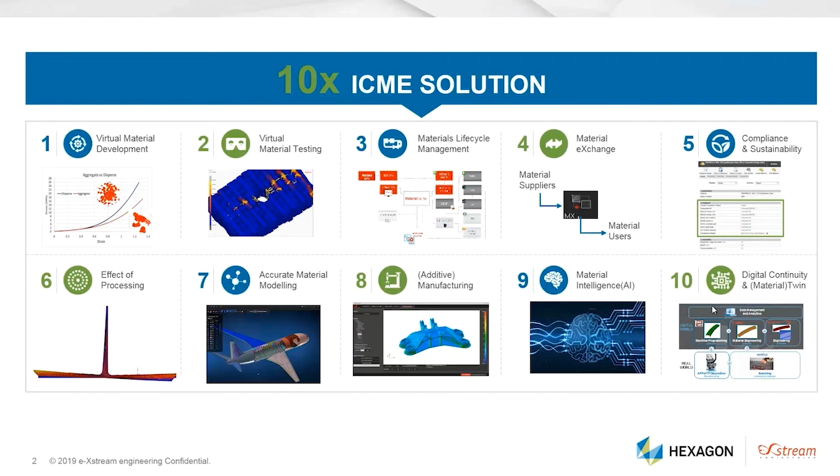At Hexagon, we provide a solution specific to additive manufacturing. It combines Hexagon production software, design and engineering software, and metrology scanners. It enables us to plan, optimize, validate, and replicate high-quality additively manufactured parts.

This solution is the combination of part geometry, topology optimization, smart AM machine and material selection, process optimization by simulation, first-time-right production, metrology for quality assurance, and metrology for reverse engineering. All these steps are backed up by a robust and efficient data management system for the entire process.

Let's focus on the machine material selection as well as the process optimization by simulation. In the next example, we could ask ourselves, for the following bracket, which orientation should we choose to achieve the best process and part performance, knowing that the material has been fixed as a polyamide reinforced with carbon fibers. We'd like to choose between two orientation possibilities: one where the bracket is oriented, and one where the bracket is flat.

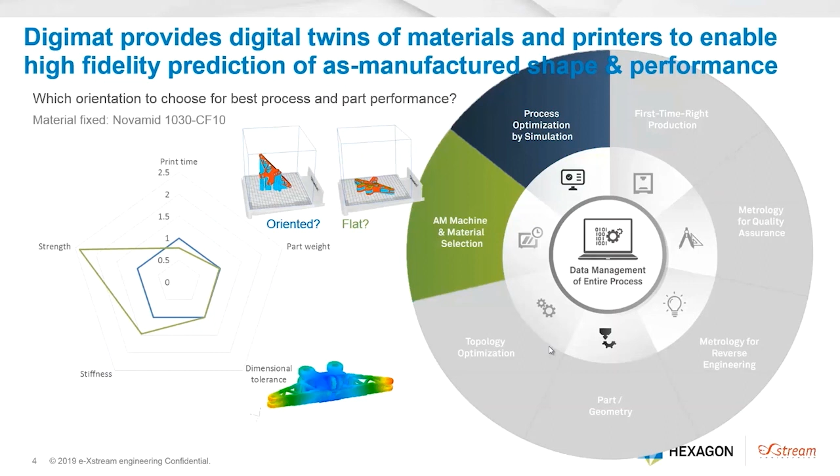To define the dimensional tolerances, we first run a process simulation of the part for the two different printing conditions. The conclusion from the process simulations is that excessive warpage occurs by default, and warpage compensation is required. Through warpage compensation, we are able to validate both printing strategies to meet the dimensional tolerances.

We can then move on with structural analysis to assess both the stiffness and strength performance of the part. This is done by running a coupled finite element analysis accounting for the local manufacturing history and the local microstructure of the material. The simulation predictions provide a very strong indication of which is the best orientation to choose.

Indeed, when we choose the oriented approach, we obtain a stiffness that is twice smaller than for the flat orientation, while the strength is approximately one-quarter of the strength for the flat orientation. Therefore, through this simulation chain, we're able to choose the flat orientation as the best orientation, combining process quality, part performance, as well as optimal print time.

Thanks, Philippe. We like to see simulation as part of the real world. This is where it brings the most value.